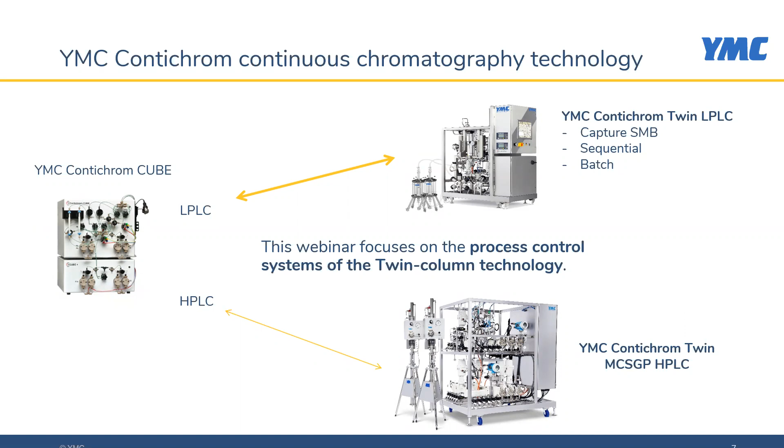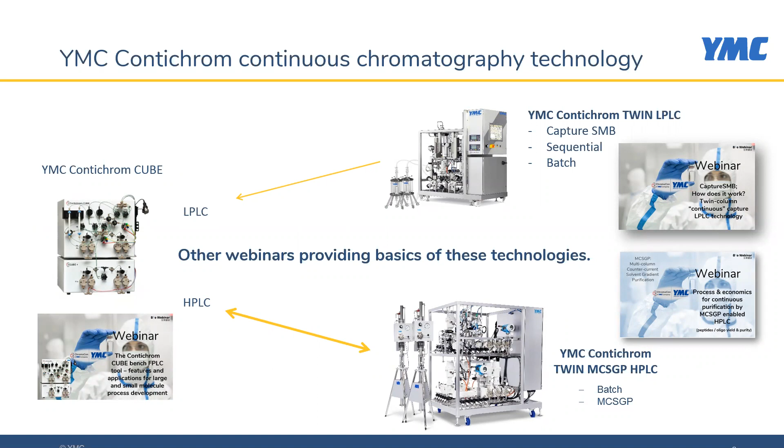Our twin column platform includes a benchtop system and our scale-up system for the twin LPLC, which can be run capture, sequential, and batch chromatography, but also our HPLC version, which is for the MCSGP application. Again, today the focus is on the process control systems for the twin technology. We have other webinars which go more into the details of the systems and of the process, but I want to focus now on the control strategy.

Just a few words about our system, and here I'm focusing on the low pressure system, but similarly can be applied to our high pressure twin systems too. We have multiple pumps on the systems. In case of the low pressure, the ecodos pumps from LEWA, which have digital motors. Our systems have multiple outlet ports with fractionation valves, have multiple inlet for each of the pumps.

We have directional valve blocks on the systems, which are crucial for operating the process. Each system has at least 2 column valve blocks, which enable the bypass, but also up and down flow on the columns. And we have multiple PAT applications, like standard at the outlet of both of the columns, UV at different wavelengths, pH and conductivity, HPLC. However, we could also implement pre-column analytics to the systems.

On the right side, you see our panels. In case of the low pressure application, we have divided panels. The lower panel is for the controls of our motors, and the upper is for the PLC and for the HMI and the IOs of the systems. And you can see here a good view of the HMI in this case.

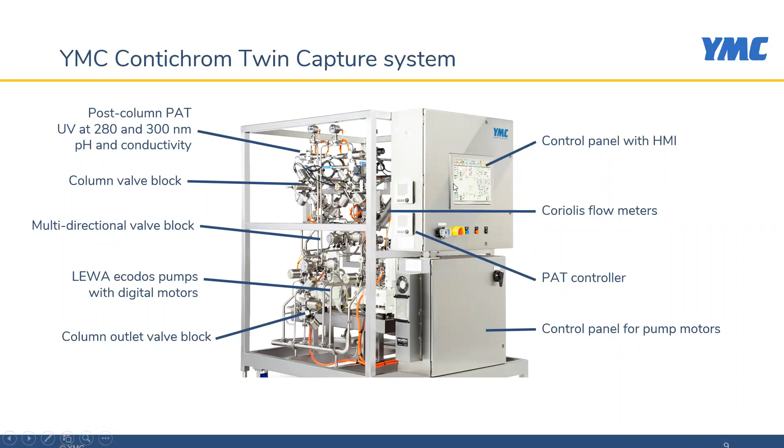So if we're looking again on the front, you see the panel with the HMI monitor. It's a touchscreen. Behind is a PLC computer in the panel. We have the controls on the front side and indicators. I will speak about this in a moment. And the front, on the lower, is a main power switch, which can disconnect the system from the electric power.

And again, on the bottom is the control panel for our motors. The panels are closed by key locks, so we ensure there's no access to the electrical power. In case of high pressure systems, the panels are purged with air to ensure the electric codes for the applications.

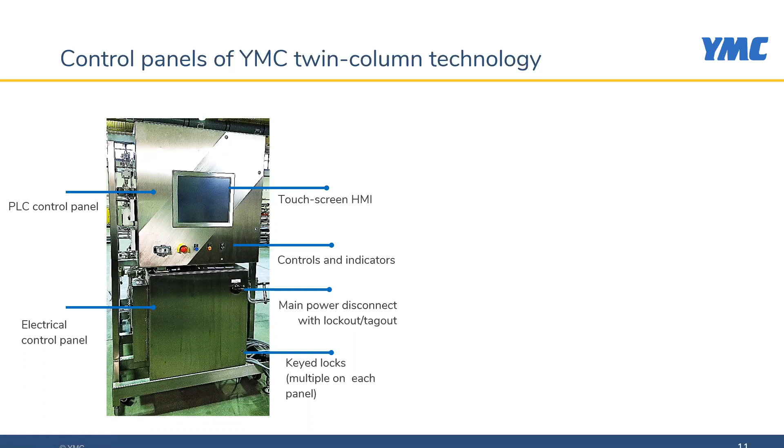Now a closer look at the controls and indicators. In the front for the low application, we have USB ports or an Ethernet port, so we can connect to the PLC and the HMI.

We have an emergency stop, a master reset button and alarm indicator, and also a signal on the panel which will make loud, annoying noises, so you ensure that you hear the alarms. Also, here's the main power switch, and this has to be engaged to the on button so the system can power up for operation.

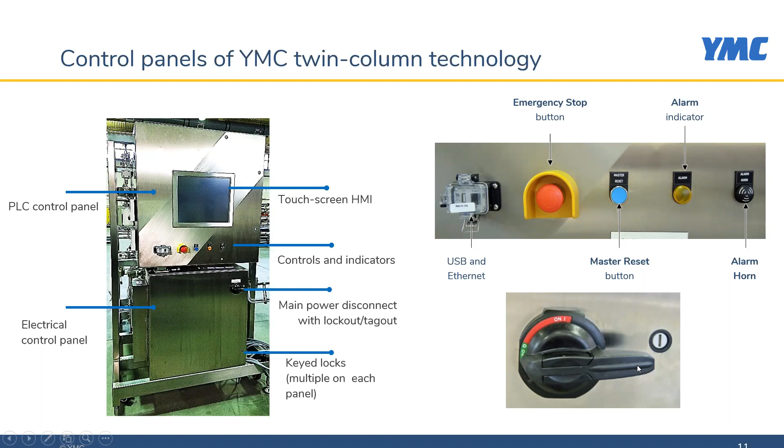Here's just a scheme of our system. We have a PLC in the panel, an Allen Bradley PLC unit. We also have an industrial-based PC HMI system with touchscreen and the option of a remote keyboard and mouse application.

The HMI is our primary interface, but we could connect secondary interfaces, say, in an operator room. The system has data acquisition and storage capability, and the computers run on the Rockwell platform, FactoryTalk. We have an alternative application in the DeltaV control system. All components of the hardware are industrial standard, so they can be serviced globally around the world.

Here, one view: the traditional field instruments which are on the skid, so that's the IOs and the PAT coming into the system, and the controller for the motors displayed on the right side.

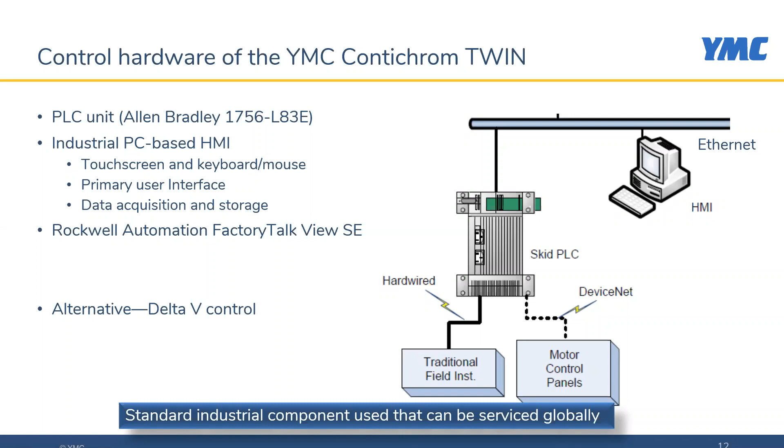That is all for the hardware, and now I'm switching to the software architecture of our systems. Just a brief overview: we have a recipe-driven control software which enables 21 CFR Part 11 compliance. We apply now, in our second generation, a graphically driven recipe building capability, which enables the application of parallel running multiple applications at the same time, implemented in sequence templates.

Our systems can run traditional single column batch chromatography, sequential applications, but also continuous applications such as the capture step or the MCSGP step. I'll focus today mainly on the capture step, but if you're interested, I can go separately into the MCSGP if you contact us.

We have implemented alarm and event recording in our system. Those are logged in the event log and can be recalled in the reporting structure. We have user groups with different access levels to the system implemented. The system can also be run manually for setup or for service applications.

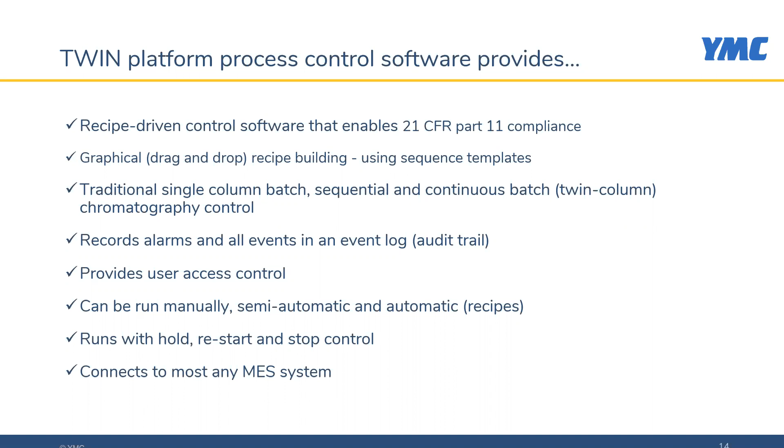We can run semi-automatically when you want to test or design your recipes, and of course for production you would run the system automatically with recipes. Our recipes and sequences have hold, restart, and stop controls, and our control system is standalone standard, but can also be implemented into your company's DCS or MES systems on site.

Okay, let's go into more details. As mentioned, we have standard user groups which have predefined access to the control software. Your operator can start, stop, halt, run, or sequence, can acknowledge prompts and alarms, can run batch reports, and configure trends — you will see that later in the presentation.

An engineer, your PLC engineer, can do everything an operator can do, but can also configure recipes, store recipes, set parameters, and stop the operation.

At the highest level, there's the YMC engineer, who has all the functionality for configuring the system and preset up for your application.

And then, of course, there's an administrative account, which can manage user accounts in your system and monitor user access. And of course, a guest account for just monitoring what is going on with the HMI — you will see that in a minute.

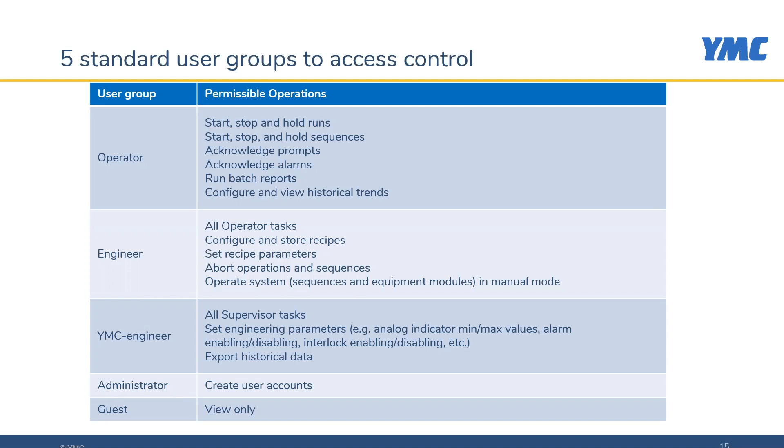The structure of our software is built of different levels, and the lower levels are pre-configured by YMC, by our automation department. The lowest level consists of control modules, which include all the IOs and digital or analog inputs and outputs of the systems — all valves, all motor settings, all PAT settings — pre-configured by our automation department.

We also summarize the IOs into equipment modules, which include things like the pump inlet valves — that's one equipment module — flow control modules for the pumps, or control modules for the columns and modules for the outlets. This is all pre-configured, and they are very similar across our entire platform.

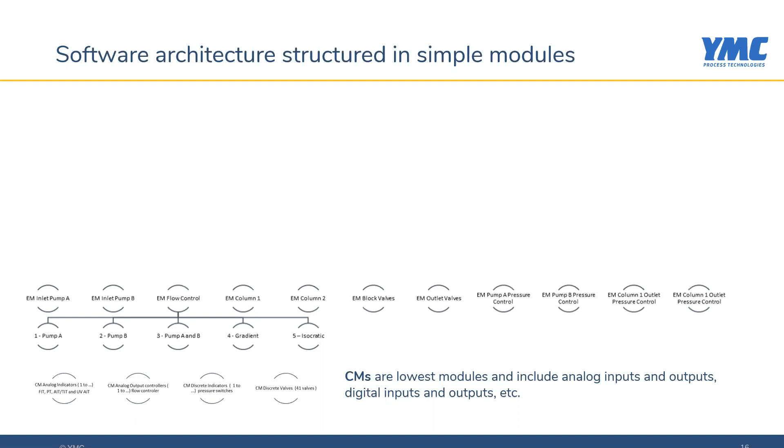So you won't see a difference between an LPLC system, our twin systems, our HPLC system - very similar design. Now we come to the next level, which is for our users.

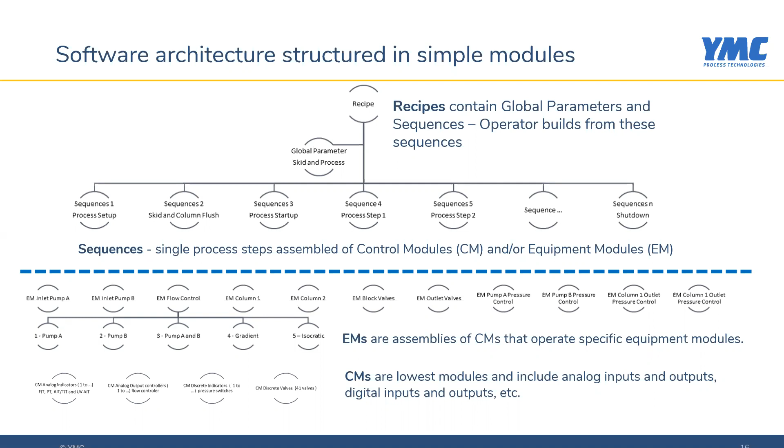That includes the sequence templates, which are designed, pre-configured from our automation department for the process application, and you use the sequence templates for designing your recipe as the highest level of the structure. Just as an example here, I'll show you our standard kind of sequence templates.

So there are sequences for setting up your recipes, where you can prompt switching on your UV lamps and identify if you want to be prompted, you can have prompts for your process runs, what kind of packing material you're using. Then there are sequences for priming your inlets to ensure all the buffers are on the pump inlets.

We have standard sequences for flushing the system, which could be used in the recipe, not only for flipping buffers, but also for doing CIP on the skid. And they have controls, so you can ensure that a particular pH or conductivity value is reached.

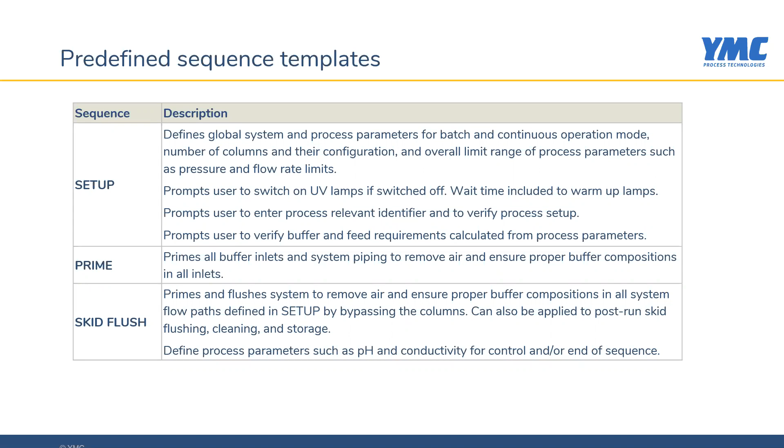We have the standard process sequences, and they might be varying depending if you're running a batch process or a continuous process for capture or for the MCSGP process. But each of these sequences has standard functionalities, and they include also the elution, how you set up your elution based on time, on UV, or on maximum peak height, for instance.

We have standard sequences for gradient, so you can implement linear gradients or step gradients. And there are standard sequences for collection.

So depending how many outlet valves you have available, you can choose how many positions. Our standard system has 6, so you can have up to 6 peak fractionation, fractionating multiple peaks, or you can do your collection based on UV, volumes, or time, depending on your choices in the templates.

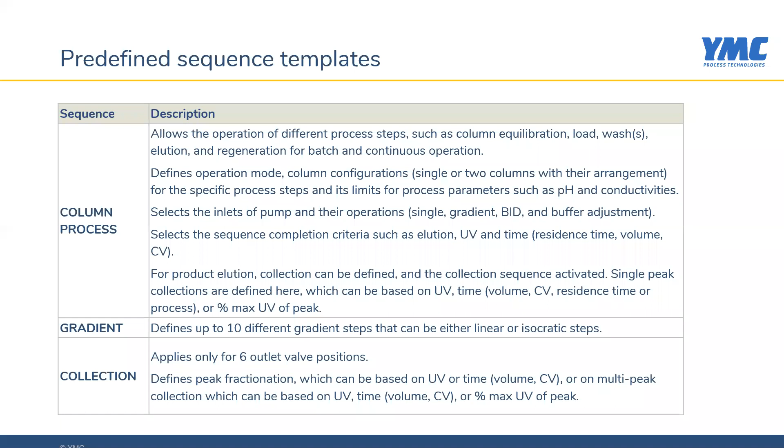We have also standard sequence templates for column evaluation. So if you're implementing a new column on your system, you can determine the plate count, the asymmetry factor, but you can also go back to your columns and re-evaluate after a run or before a new run when you reuse a column.

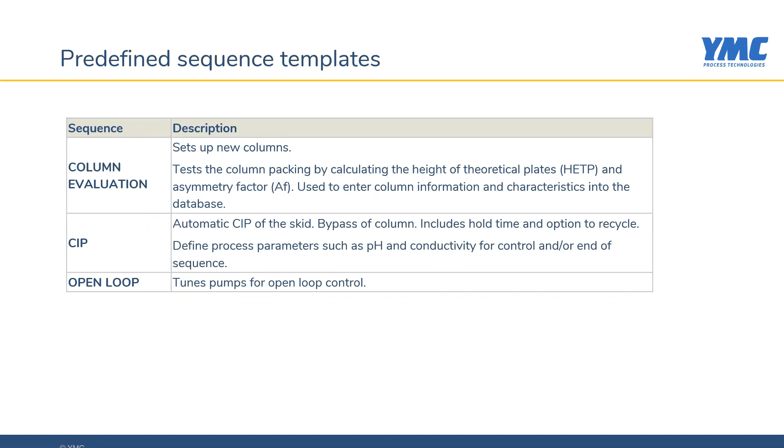We have CIP flush when you have the automated CIP manifold on your skid, and then you set up an automated CIP. And we have the sequence for open loop tuning, which is more a configuration function when you're doing maintenance on your column, so you can recalibrate your pumps for the system.

As I mentioned earlier, we have also different statuses for recipes. So when you set up a recipe it would be in a development status. You can configure all the sequence templates, you can test them. This is done usually by one person with the appropriate access levels, and it does not require a second person verification.

If you put your recipe into production mode, this transfer requires second person verification, but also the execution of a production mode recipe requires second person verification in the execution of the recipe, and you will see that in a moment.

And then you can take your recipes, and if you no longer need them, you can put them into archive status. They will be saved in the database, and you can call them up and use them as a template for a new development recipe, and we would rename your recipe so there is no conflict.

So just a brief overview of the recipe statuses, and that brings me now to the HMI of our system, the human interface. We have a very user-friendly system.

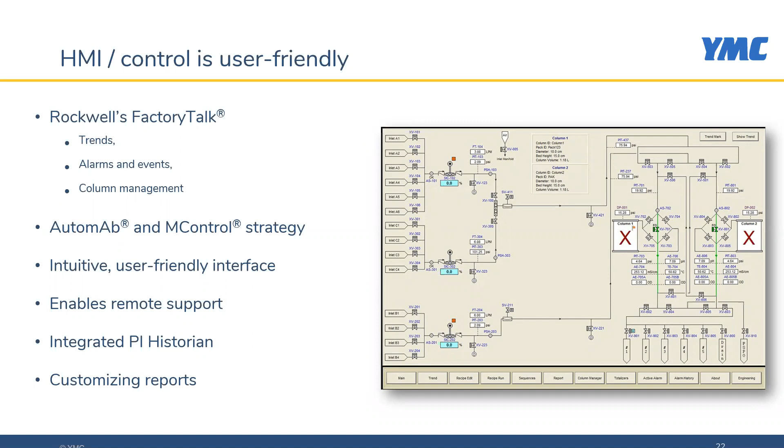Our control software has an integrated historian, PI historian, where the data are saved. And also we have a report capability, and these reports can be customized by the user.

Okay, so when you start up the HMI or the system, you will come up to the YMC process technology login window.

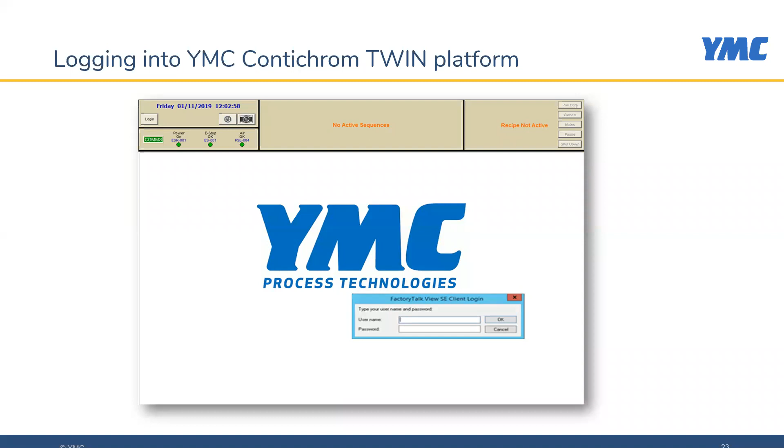Depending on the user group, you will log into the system, and that will give you access to the screens, depending on your access level. I assume I log in as a YMC engineer, so I will have access to all the windows. If an operator logs in, they will have limited access. So again, that was your login.

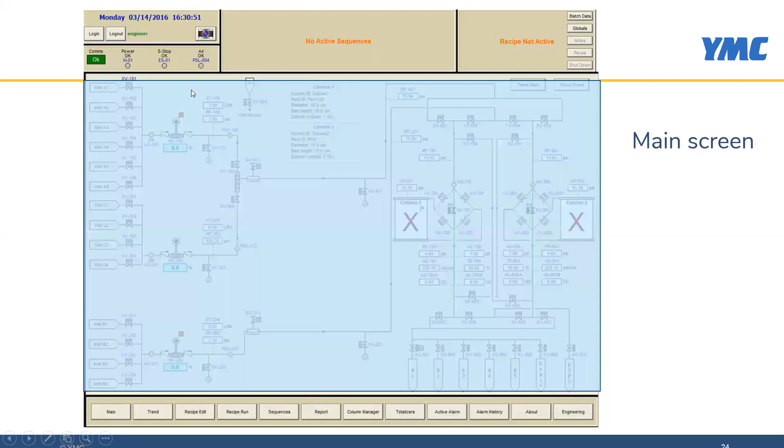That will then open the main HMI screen. Here I was signed in as an engineer, so I might have access to most of the screens. Just pointing out the main components of the main window: on the upper left side is the status window with login, giving you an overview of if all the power is in place, the e-stop is not engaged, and you have the air.

If there's no red sign, you can operate. We also have a little camera upstairs, so you can always take screenshots. The middle part of the upper HMI screen gives you information about the active sequence running in your recipe, or if you run just sequences separately. The upper right side gives you information about the current running recipe.

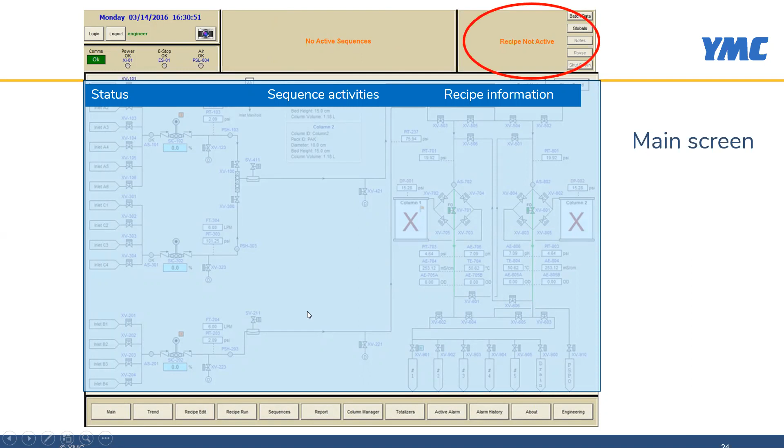On the bottom, we have the other windows available to the users, and again, depending on your access levels, you can access different screens. I'm highlighting here the trends, the recipe editor, run, sequence, report, the column management, the totalizer, alarm and alarm history, and the engineering screen.

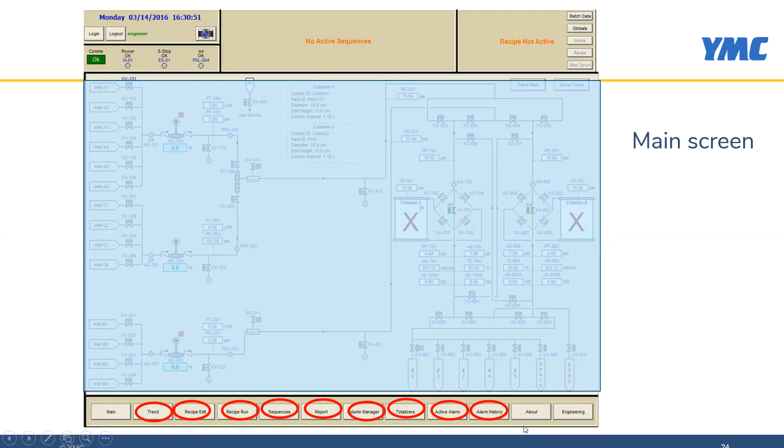I will go through each of these screens in the following presentation briefly, so you will have more insights there. But you can see that on the HMI screen, you have all the main components. In this case, we are showing a 3-pump system, 2 pumps delivering a gradient for the capture SMB step,

and the third pump, the B pump, is for the supply of the feed in the system. You can see the pumps, the inlet valves, the flow meters, which are in control with the pumps. We have information about the columns attached to the system. You can see all the valving and the PIT or pressure indicators.

In this case, we have only post-column PIT, pH and conductivity, and UV. You can see the column valve block with forward flow, backward flow, and in this case, the columns are in bypass. And here on the lower right side, you see the outlet valves.

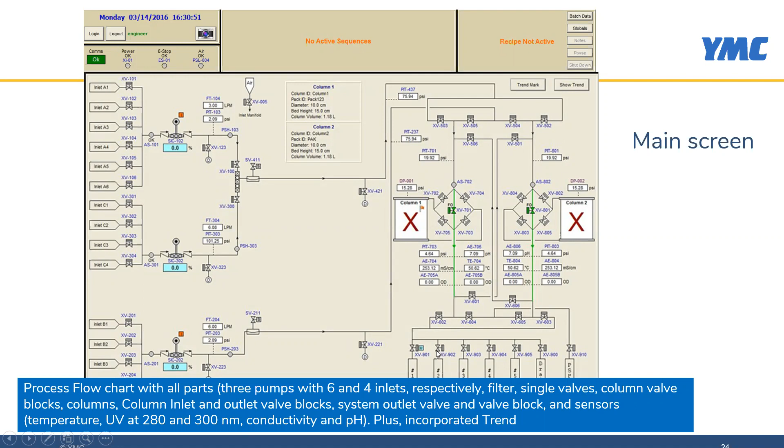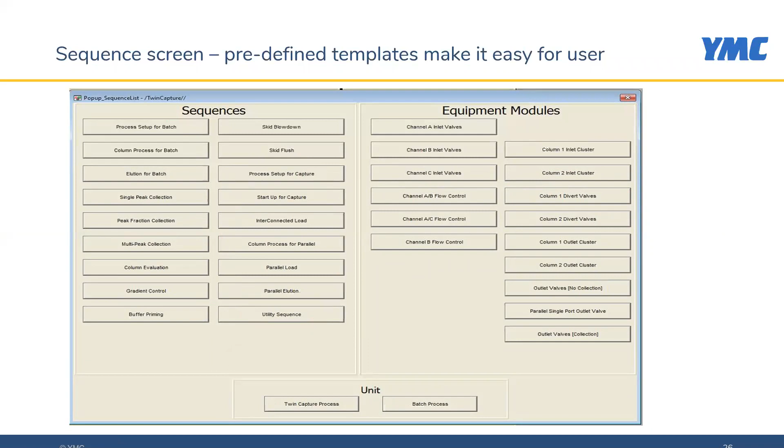But you, as a user, will only have access to the templates - in this case, on the left side for the batch operation, or in the middle, the templates for the continuous capture operation. You can open these templates and test them in a kind of semi-automatic fashion. I will speak a little more about this later.

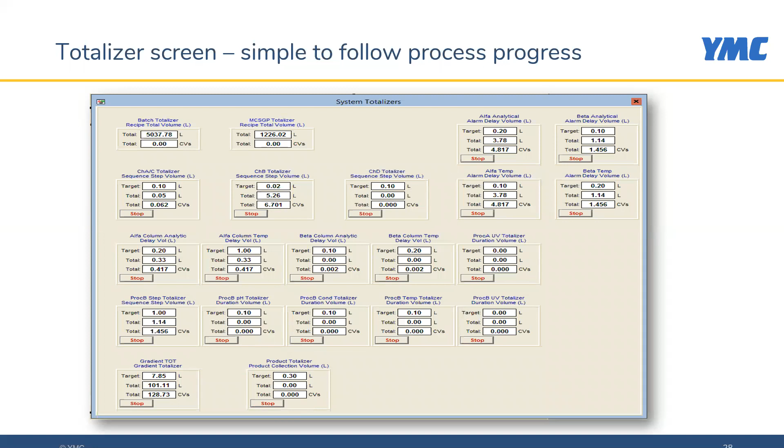As I mentioned, we also have an event log where everything which happened on the system is logged. That includes alarms, and it also includes the login of users. Now I'm logged in as a YMC engineer, and that would be visible on the event log.

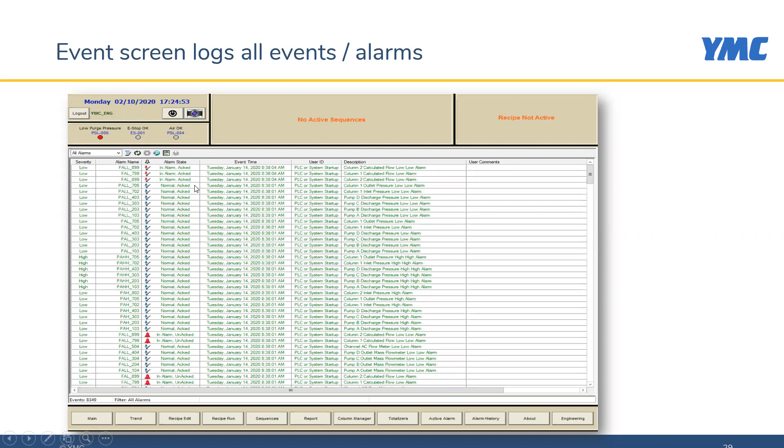On the alarm historian, you see in this case an alarm came up, and you as a user, as an operator, push on the upper left corner, and an acknowledgement window comes up. You can then add the reason why the alarm was there and acknowledge that you have seen the alarm.

In case of an alarm, it will show up on the screen as a red line or a red alarm. If you have a warning that you come in a low or high value, say of a set flow rate range, then that would show up as a yellow line. But you also have to follow the same procedure of acknowledging it.

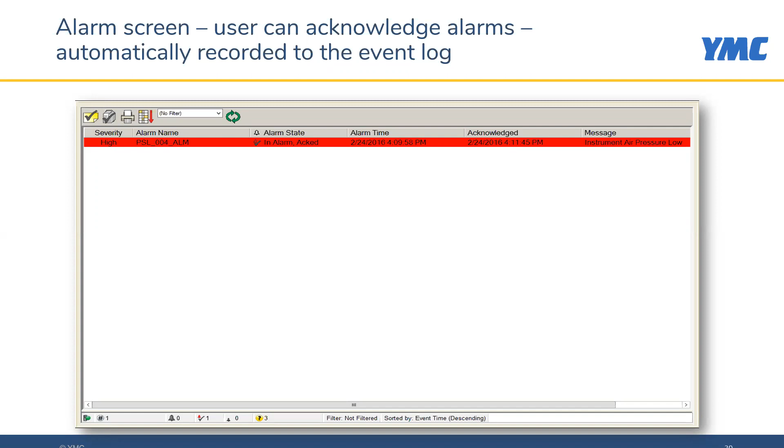I come now to the last screen, the engineering screen, and this is mainly used for configuring the system, so for our YMC engineer, but also your service engineer will have access to this screen.

So if you need to do a new pump tuning after a service, then you can run the pump tuning functionality. I want to also point out we have the report configuring.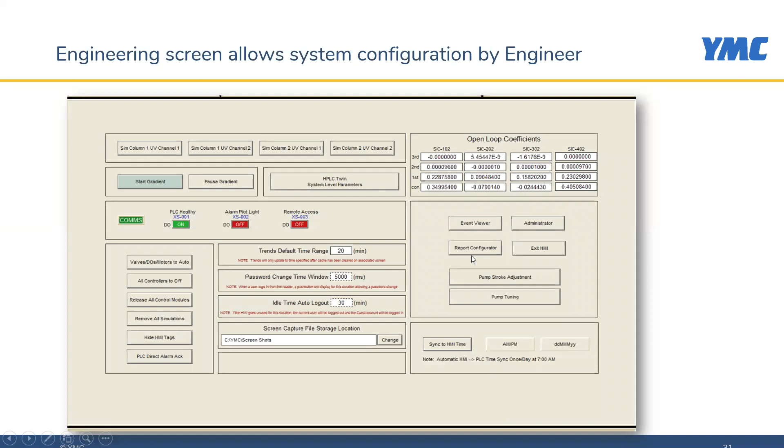I want to just highlight here in this screen the reports. Your batch reporting can be pre-configured to your needs. Also the recipe, the cycle reports.

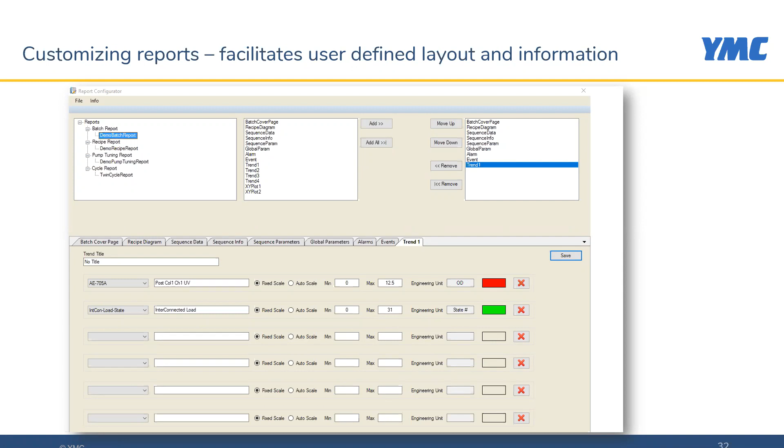We had a separate webinar where we went into more detail about how you configure the report. I have to refer, due to time limitation, to this webinar.

Okay, how we operate. So you have seen now all the screens we have in our control software, and I just wanted to give you a brief introduction how to run the system manually, semi-automatic, or automatically with the recipe.

In case you just have the system new in your facility, or you just bring it back after storage, you can set up the system manually, make sure the lines are flushed so there's no air in the system anymore, and you can do that manually.

You can push the buttons of the pumps and the valve and transfer them from the auto setting to a manual setting, and then define the parameters.

You see here in the background that the open flow path is highlighted in green, and any valve which you have open in this case has a little indicator on top with an M, and that indicates that it was manually shut open, and you can see that here on the outlet too.

And if the flow path is open, you can now flush the system manually. It is also something after you do a service, you want to quick check that everything is okay.

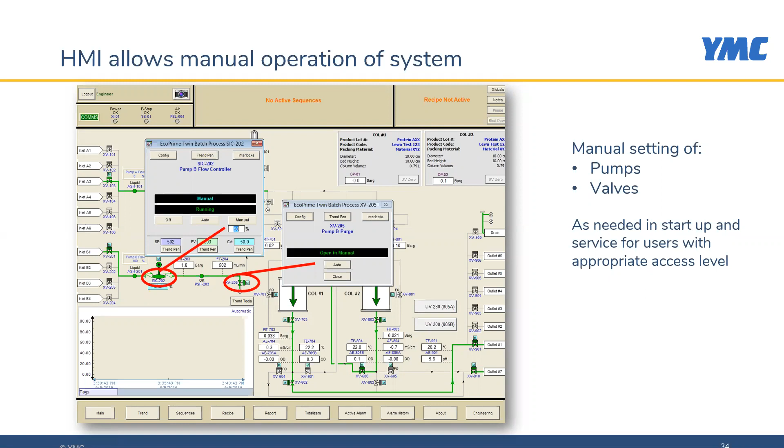The system also can run just by recipes, and here I show the column elution template. So you go in the sequence screen, call up the column elution template, and then push the parameter button and define the parameters.

You can also use this functionality when you want to set up your recipe for the recipe run and just test parts of the recipe, a sequence, to see that everything is set up exactly, so you can run a separate sequence by itself.

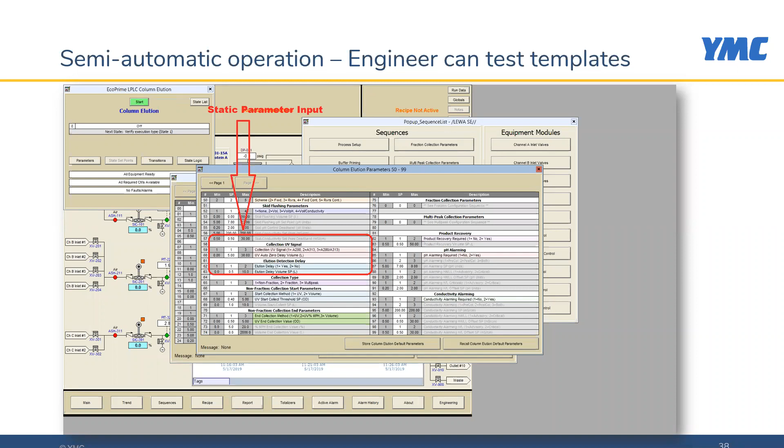But of course, for your manufacturing process, you want to run the recipes. And we have a separate webinar which goes in really detail how to configure and execute the recipe.

I just want to highlight it is easy now with the drag and drop functionality, so you can configure your recipe with the predefined sequences, and they are now predefined for your application. So if you're running a capture step, then you have to choose here the twin capture.

If you have a batch process, you have the option to choose a batch process here on top and configure the recipe. Again, there's the option of running them in development and then transferring them into the production recipe. All recipes are stored in a database, and there is an audit trail for all the activities going on there. On this screen, you see all the templates for the continuous capture step.

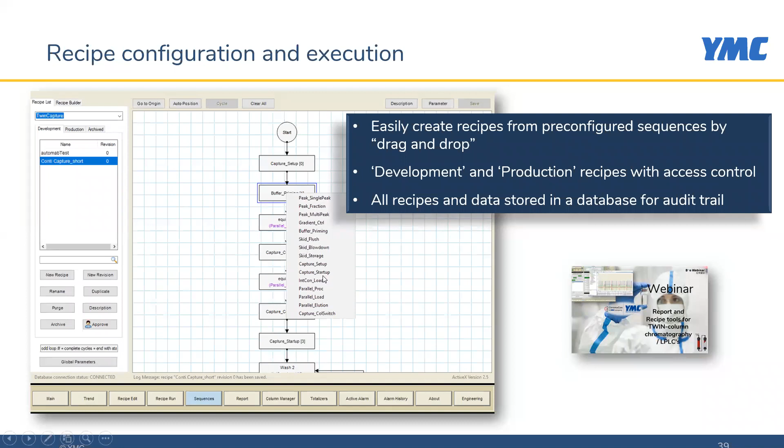Just a few items here. When you create the recipe in the development state, you have the option to do a new recipe from scratch, or after you create the recipe name, you can duplicate an existing recipe and use it as a template, or you can recall a recipe from the archives.

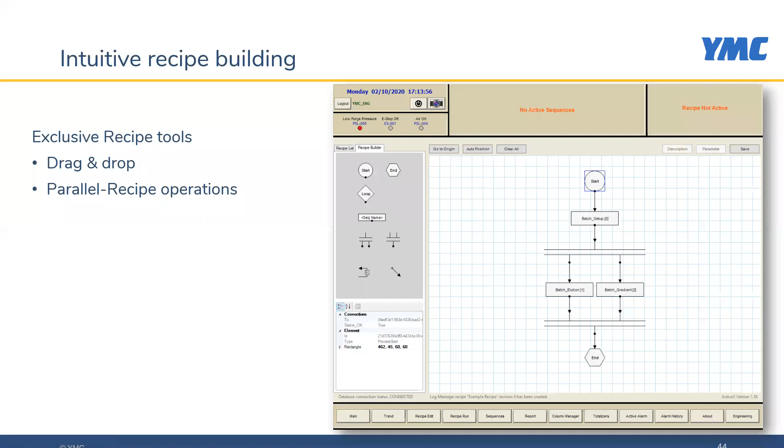Here, just to show again the easy drag and drop functionality of our recipe builder. You can see there's the function box, and you drag them over, then define them here in the field for the application you need with a sequence template.

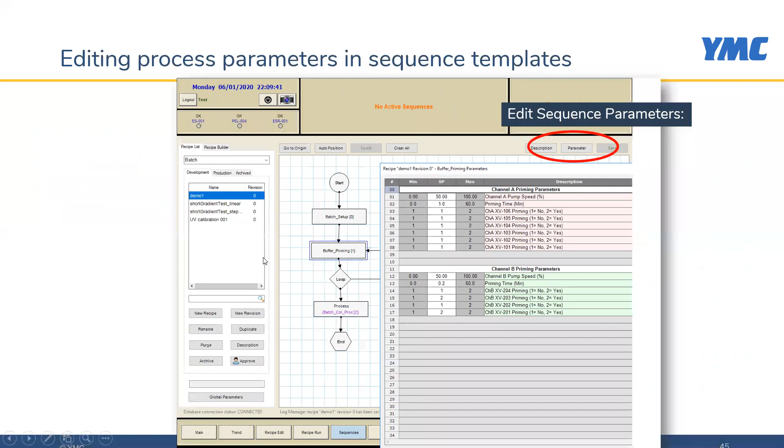Very easy to implement. In this case, you can see when you click and define the parameters to your process needs. Again, I can't go into detail on how to define this.

I just want to highlight that each recipe has global process parameters which define the alarm settings for this particular recipe. So you have the high and low parameter set for the flow, for the pressure, the delta P over the columns, for instance, and they will be saved together with the recipe parameters in the database.

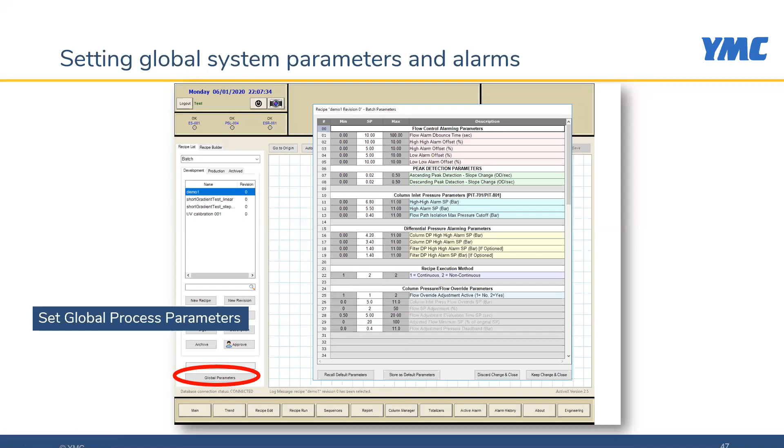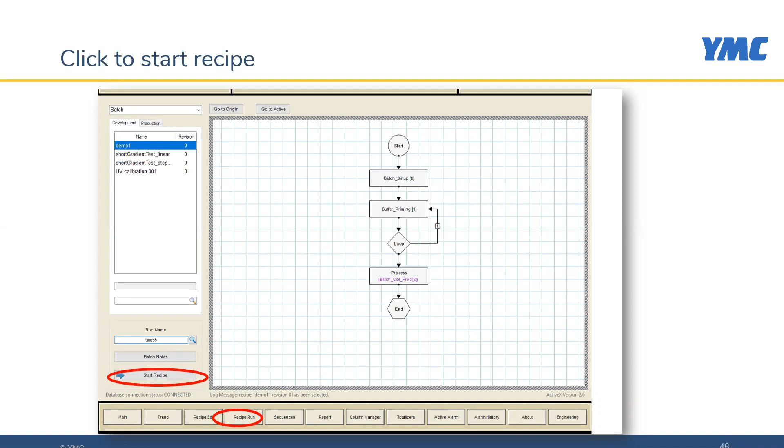And then we're coming to the last screen, the recipe run screen. You give each recipe a unique run name, and there cannot be any repeats of the names. You can then start your recipe here, and if everything is configured correctly, it will start and you can monitor it.

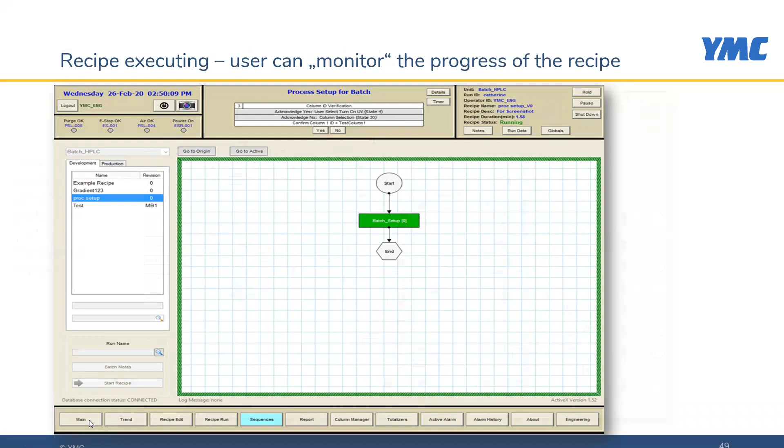You also see on the right side the recipe running, now active on the screen. If we push the main button, for a capture step, you can also follow the progress of the recipe.

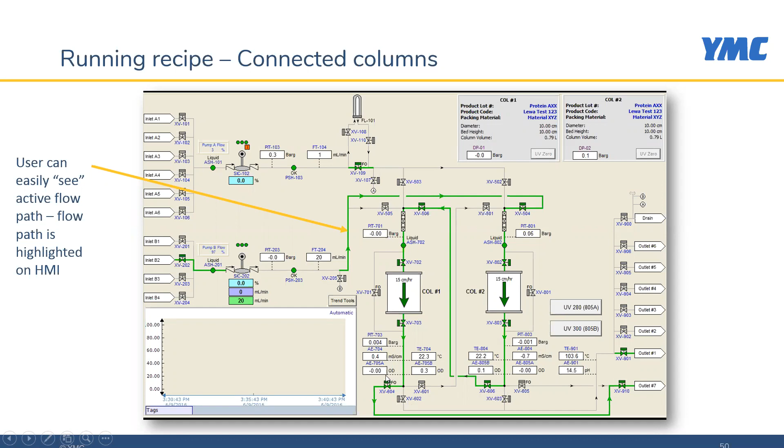In this case, nicely shown, we are loading both columns, starting with column number 1 for the continuous capture step, then going to the second column, and you can follow the flow path very nicely. You can follow all the PAT on the system: the pressure indicator, the post-column PAT, pH and conductivity, and the UV for this application.

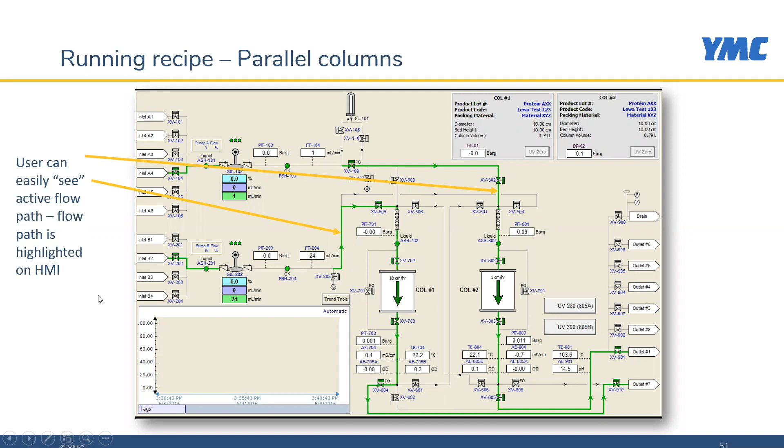I'll also show you parallel operation. So pump A is feeding column 2, and pump B's feed solution goes on to column number 1, and you see the parallel outlets. It's a very good tool to follow the operation of your process.

You can also look at your trend screen and highlight the information you need to monitor. In this case, I'm following the flow, the UV signal, and my outlet valve, so I can monitor that the product peak is collected in the time window I want. I also follow the different flow rates on the system.

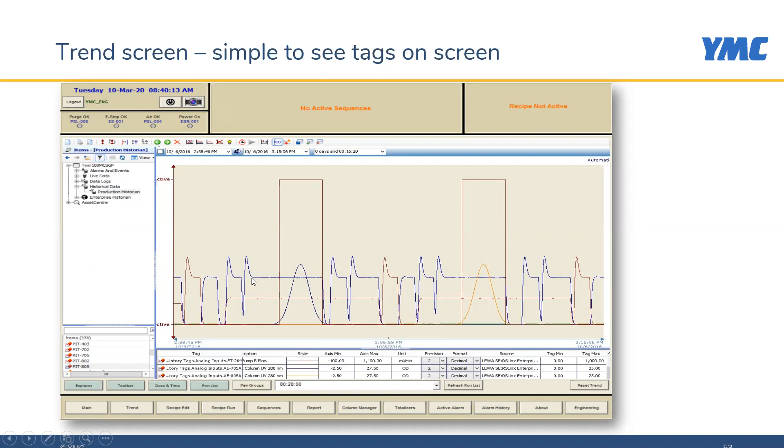This is the loading flow rate of pump B, and you can see here in parallel operation, while pump A is loading the column in this case. If you want to know more about trending, I refer you to the separate webinar we have given.

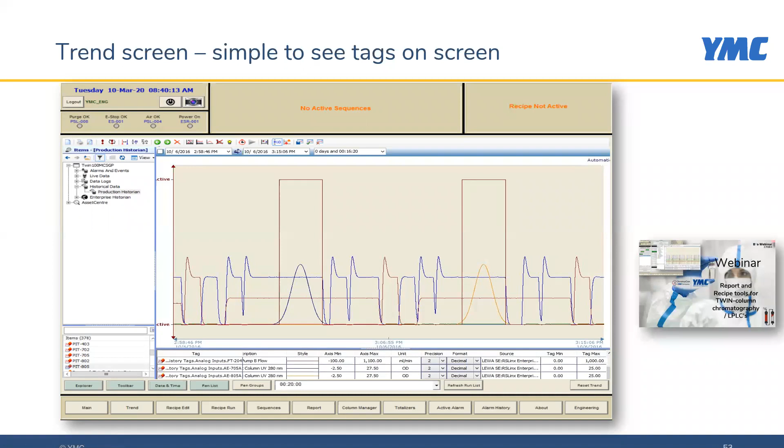At the end, I want to summarize quickly. If you want to generate reports, there are different options available. After you write your recipe, you can generate a recipe report and compare it with your requirements.

In case of a development report, you can then update the parameters if needed, and transfer this recipe into a production recipe. Again, you can print this recipe report as proof.

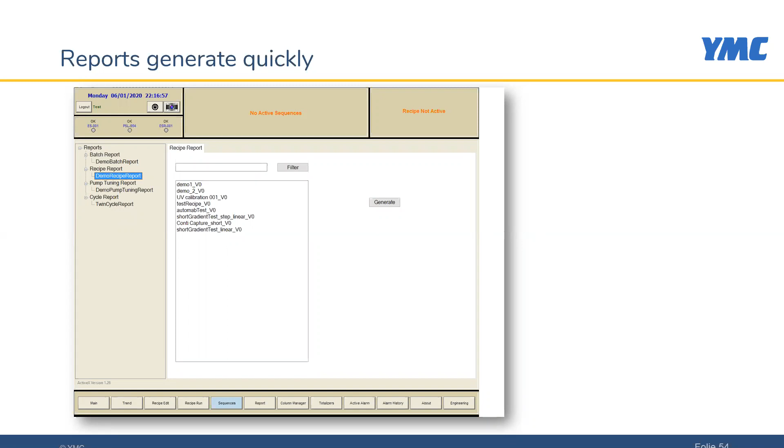After running your process, you can print your batch report, which in case of a continuous process is very long and could span days. So we provide a third option where you can print a report after each elution, with the adequate information you need to monitor your process. Just push the button 'create report.' Again, we have a separate seminar where we go into more detail.

Just an example of a report — that would be the front side, and you can configure the report. The generation of the report depends on the amount of information in it, but could be done within seconds. You can have it at hand.

You can modify or adjust the report structure, but each PDF printed has a timestamp, so you know exactly when it was printed. And you can have in the report, besides the recipe information, also information about the performance of your process, like peak analysis of each elution peak in a continuous process, or a transition analysis if you do that during continuous operation.

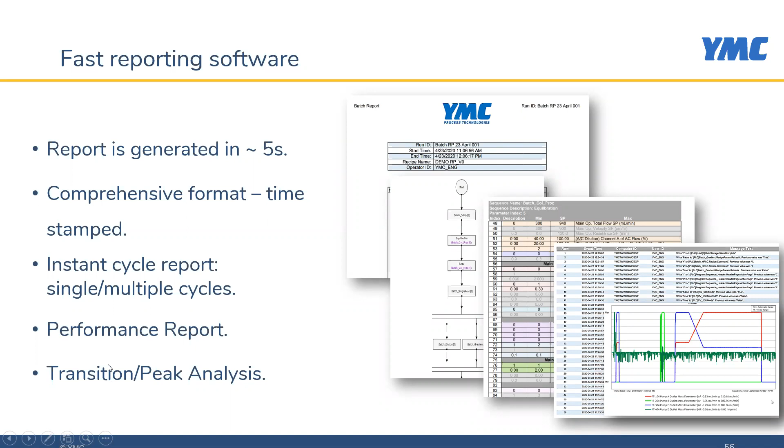I want to summarize at this point and refer you to the other seminars for more detail. I hope I could present a comprehensive overview of our automation platform, which is compliant to 21 CFR Part 11. It is an engineering application that can be used for development and production. It uses commercially available components which we configure to the application needed, and so we enable you as a user to have recipes for your application.

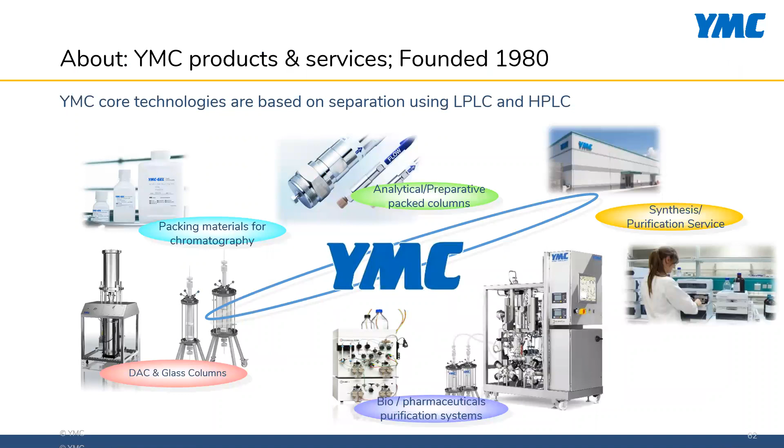Okay, I'd like to bring back Kathleen for Q&A. We do have time for a limited number of questions, so let's get right to them. The first question is, Kathleen, you mentioned Capture SMB and MCSGP. Can this software operate both of them on the same system?

We have the MCSGP as an HPLC skid, so that would be different software packages to use. And as I indicated in the presentation, we have a lot of overlaying functionality, but then the sequence templates are specified for the application.

Very good. Is this open source software? We're using commercially available software packages from Allen Bradley, or Rockwell's FactoryTalk. However, we configure, as I hoped I could show you in the presentation, these available functionalities to the application. Plus our application, the MCSGP process for instance, is patented. So it's not that you can access the code of the configured system and modify it. So no, it is not open source.